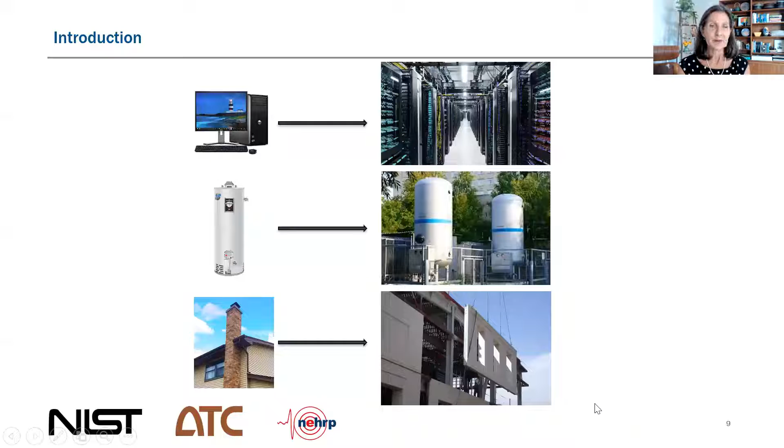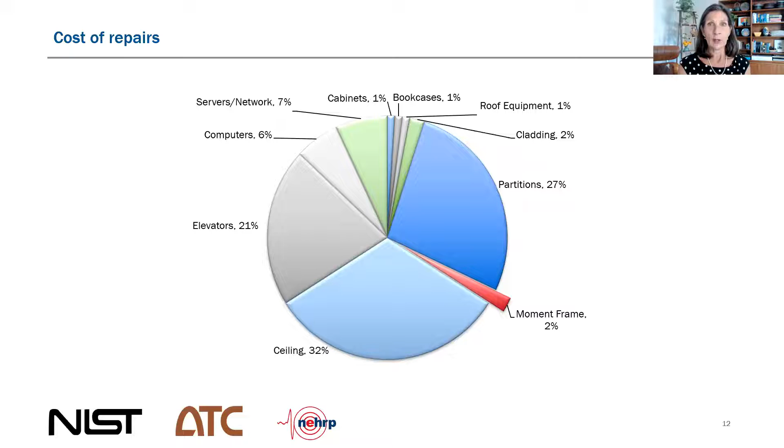Not surprisingly, because of the value they represent in the building, in most earthquakes most damage is going to be non-structural. This pie chart of damage is just one building in one earthquake scenario, but the reality is that in most earthquakes, for most engineered buildings, most of the damage is going to be non-structural.

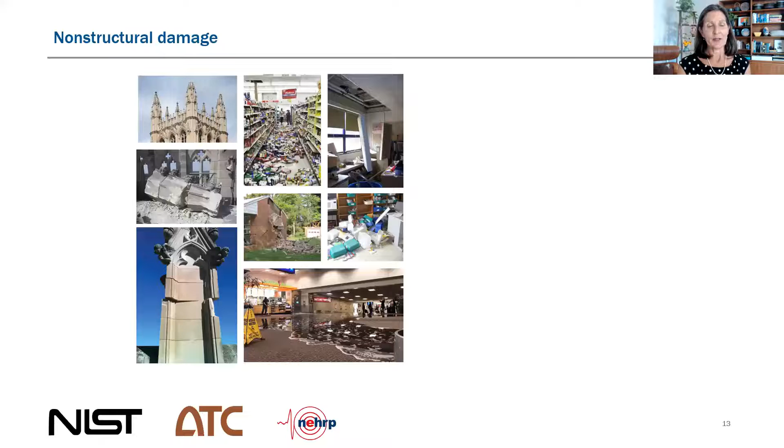And past earthquakes have certainly borne that out. Not only is it mostly going to be non-structural, even in small earthquakes non-structural components can be damaged. All of these images are from really small and short earthquakes. So hopefully that grabs your attention, and hopefully everybody recognizes that non-structural damage in earthquakes is going to affect all of us - where we live, where we work, where we shop, where our kids go to school, and our national treasures.

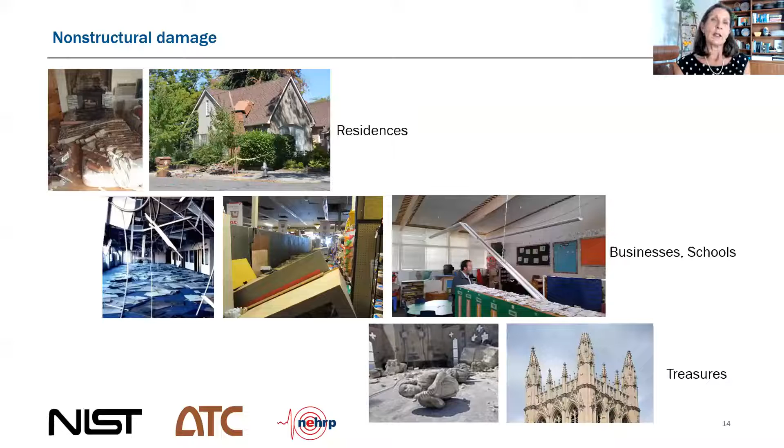It's a big deal. So now let's shift and look at the consequences of non-structural damage. We usually divide it into three categories: risk to life safety, property loss, and business interruption. So let's look at each of those.

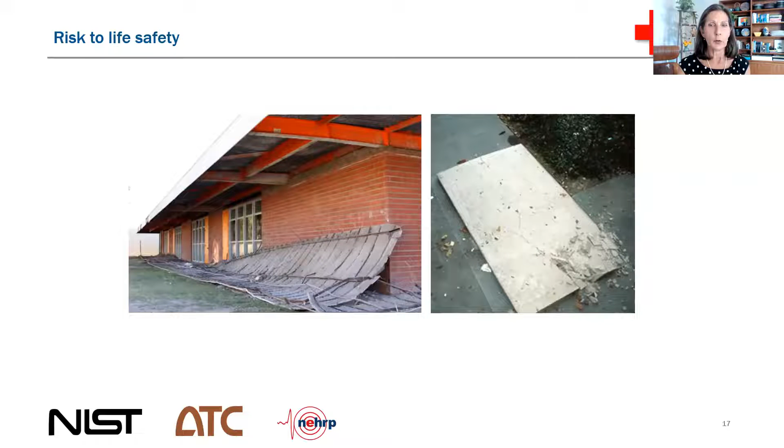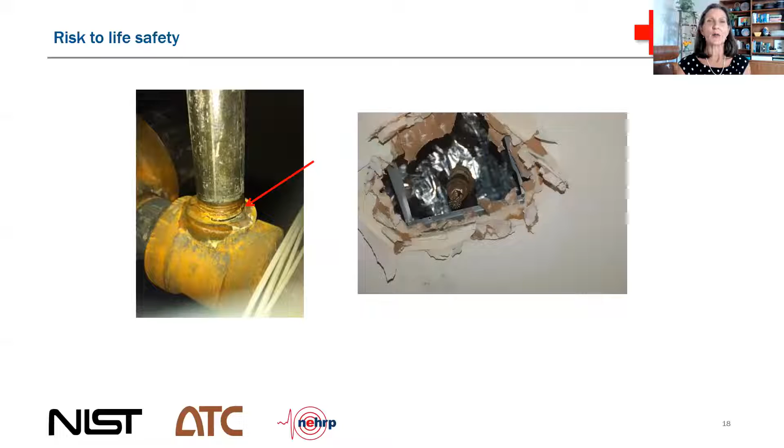The other way that non-structural components pose a risk to life safety is if our life safety systems can't function. So here's some sprinkler damage - if the sprinkler system isn't available to fight fires after an earthquake, that can pose a life safety risk. Similarly, if you can't get out of the building, if egress is blocked, that poses a risk to life safety.

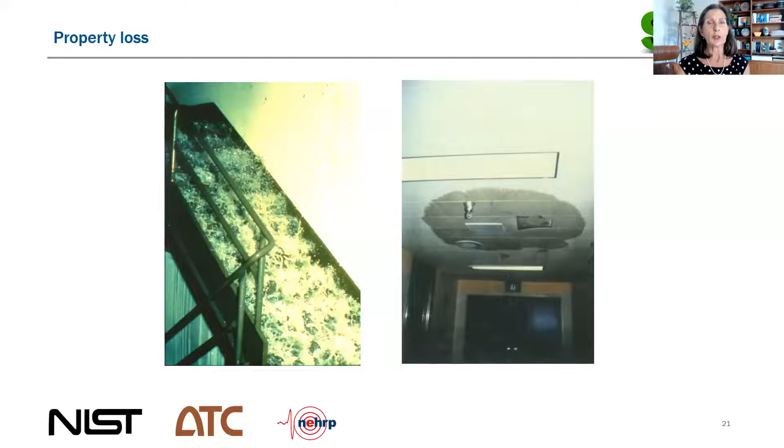So let's talk next about property loss. If it costs money to fix it, that represents property loss - it's a pretty easy concept to understand. What's equally important, and maybe even more important, is recognizing the consequential damage that can impact the losses. For example, when a water pipe breaks, the cost of repairing the pipe could be almost nothing compared to the cost of repairing all the damage from the water. And it's particularly true for pipes under pressure - if they aren't turned off quickly, the cost and losses can escalate very, very quickly.

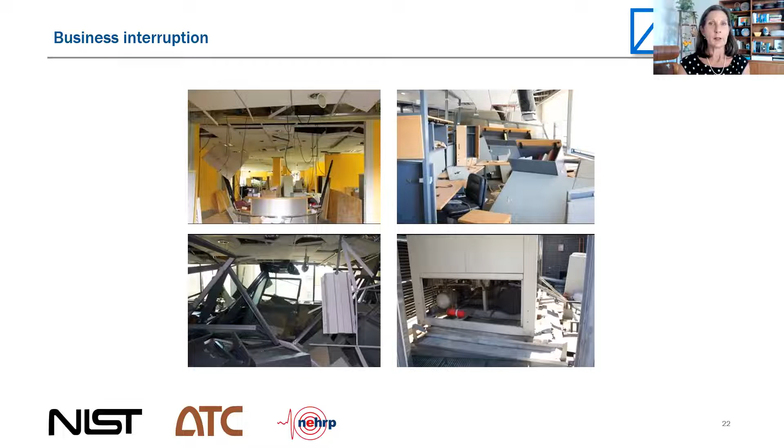And then business interruption. Many businesses will lose money if they can't get back into their buildings. And if you're a manufacturing facility, oftentimes those costs are measured in millions of dollars an hour. So business interruption can be a costly consequence of non-structural damage.

So I want to shift gears and give a little bit of context to this field and the design procedures that we're trying to develop. Let's say we are interested in designing the supports and bracing for a suspended operating room light in a hospital. What I want everyone to recognize is that the design of the non-structural component is at the end of a very long chain of events that starts with the earthquake.

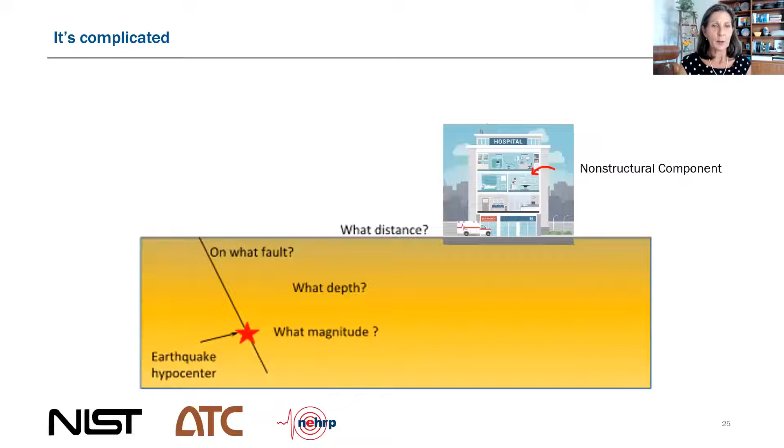For example, we have an earthquake. We don't know exactly how far it is from our building. We don't know how deep the earthquake is going to be. We don't know what the fault characteristics are necessarily. And then we have these waves traveling through the ground - we don't really know what the ground is, we don't know how the attenuation relationship is really going to go.

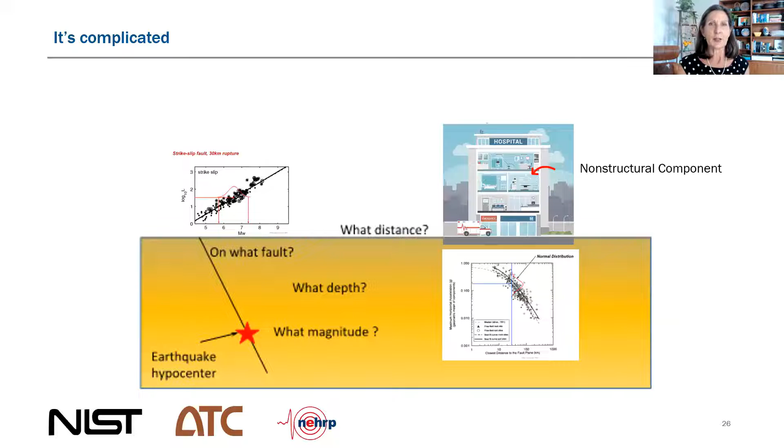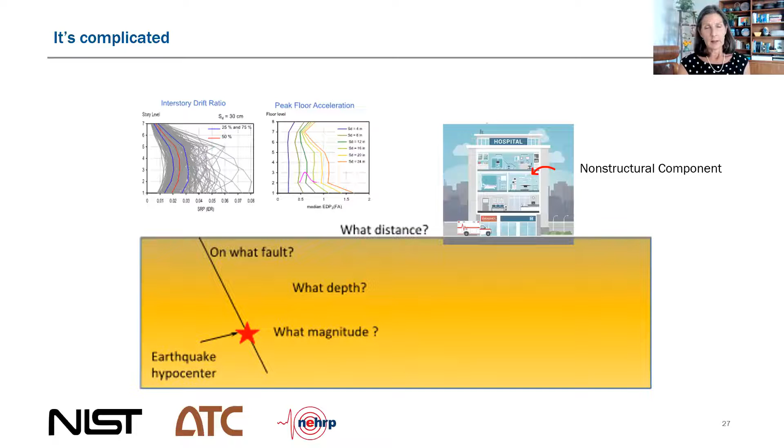And then we get to the building. So now the building is being shaken by this earthquake, and it has its own dynamic response based on all its design parameters. And then finally, we get to the floor that is shaking with some deformations and some accelerations, and we get to the non-structural component. That component can be connected to the floor in many different ways, and each of these has its own unique dynamic response to the shaking that it experiences. And then you've got it connected with all kinds of widgets and stuff.

So the point is that there's a lot of uncertainty in that process. And to think that precision is valuable here is kind of a misnomer - don't worry about too many decimal points. I think what's important is to get the science about right, to make sure that we're addressing all the elements that are important to us, and that we don't get too caught up in the precision of the design tools that we develop.

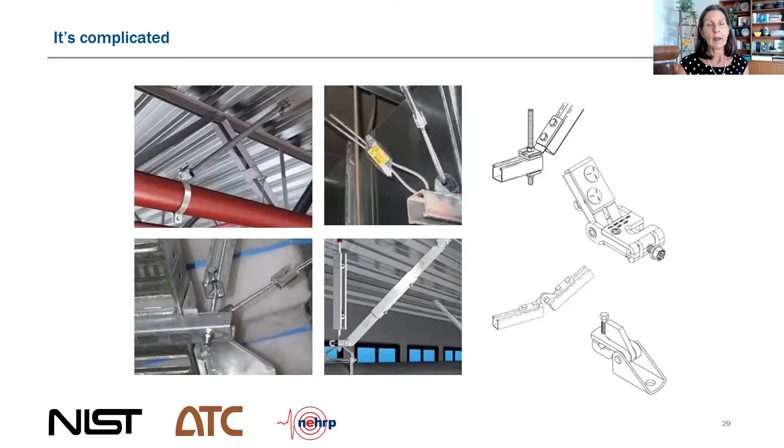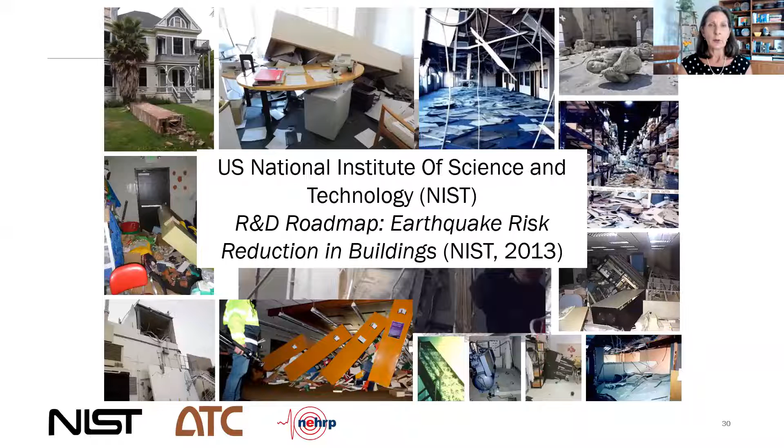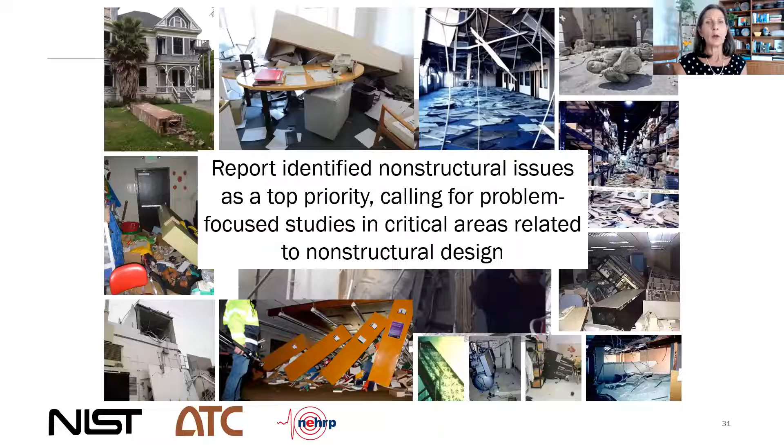About 10 years ago, NIST, the National Institute of Standards and Technology, got together a team of experts to think about what research they should be doing over the following 10 years. That group wrote a report, and in it they identified non-structural issues as a top priority, calling for problem-focused studies in critical areas related to the seismic design of non-structural components. That is how the ATC 120 project was initiated.

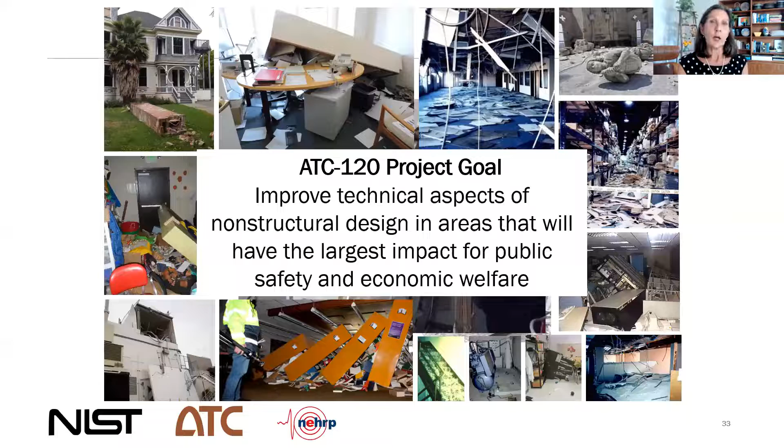NIST went to ATC, which started a project with the goal of improving the technical aspects of non-structural design to get the most bang for the buck, focusing on the things that are most important. This ATC 120 project is really the foundation on which the code changes we're going to talk about are built.

The ATC 120 project ran like all good ATC projects. Many experts were involved from all walks of this field. We got together over a period of many years, and Brett and I were both leaders in this effort. The first thing we did in the first year or so was a knowledge study, bringing together everything that was known so we didn't duplicate it and could build from that. This is a great document that's available for free and provides a nice background for anybody who wants it.

The subsequent years we spent trying to figure out all of the components to the problem—what are all the things we need to study together to come up with how we should be designing non-structural components. You can't just look at one thread; we had to weave them all together.

We wanted to look at and evaluate the existing code requirements, study parameters that affect non-structural component response, and use available strong motion records to get quantitative information, supplemented with analytical models of buildings. We needed to investigate anchors to concrete, since most non-structural components are anchored to concrete. We wanted to see if we could develop a design philosophy for non-structural components, and look at the performance objectives we should be using. These are the kinds of things we did as part of the ATC 120 project.

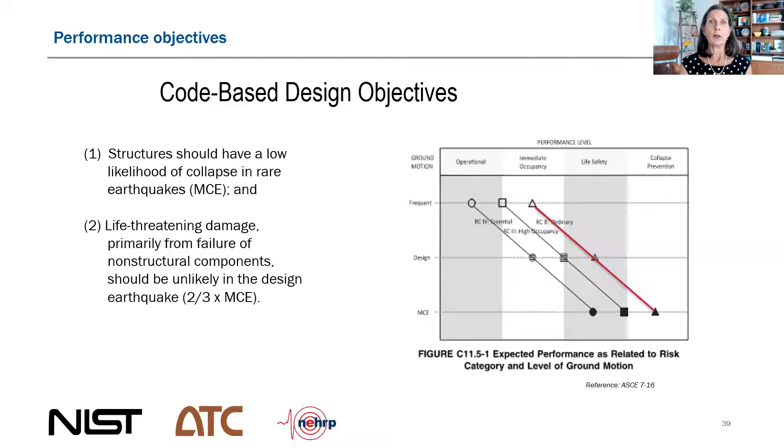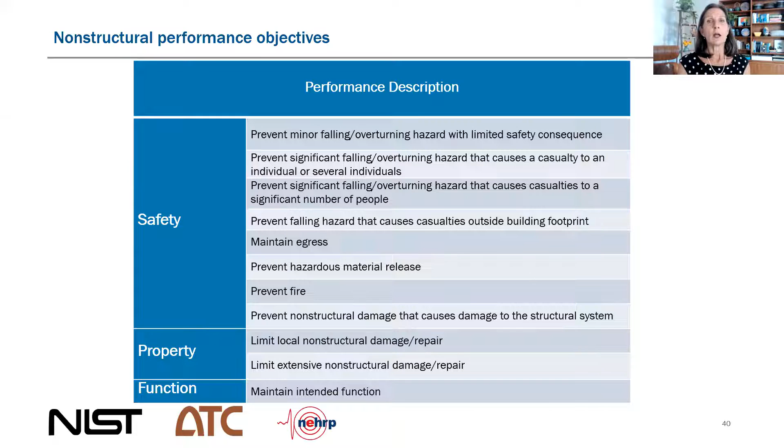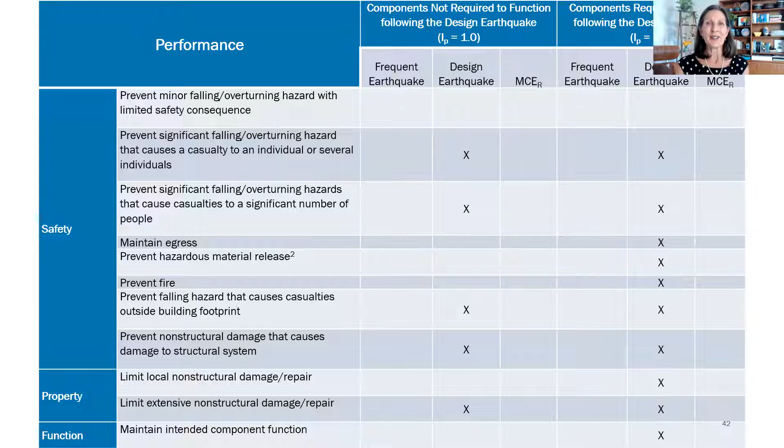We have a matrix showing non-structural components divided into 2 categories: those that don't need to be functional after an earthquake—importance factor of 1 components—and those that need to be functioning after an earthquake, importance factor of 1.5. We filled in the blanks to see what we're trying to do and what we need to pay attention to in order to get the code provisions right. Mostly I want to point out not just what's in the code and what it's based on, but what it is not.

And the code, again, for most components, is not worrying about function or property loss. Those are things that if you really want to worry about them—and being up and operational after an earthquake is critical—you need to do something more.

So anyway, there's a whole chapter on performance objectives. Then we looked at the current code and studied how it was doing, and whether or not there needed to be any improvements to it.

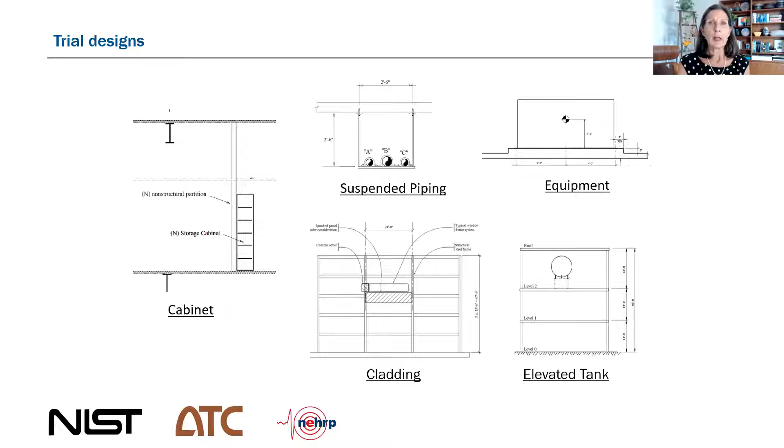The way we did that is we identified sample problems, these design examples, and had five different firms work through design problems to see if they could come up with comparable answers, and to see where the glitches were using the code, implementing it, and understanding it. From that we got their comments, and then we went section by section in the code to create a roadmap for improvements we wanted to see in the future code edition.

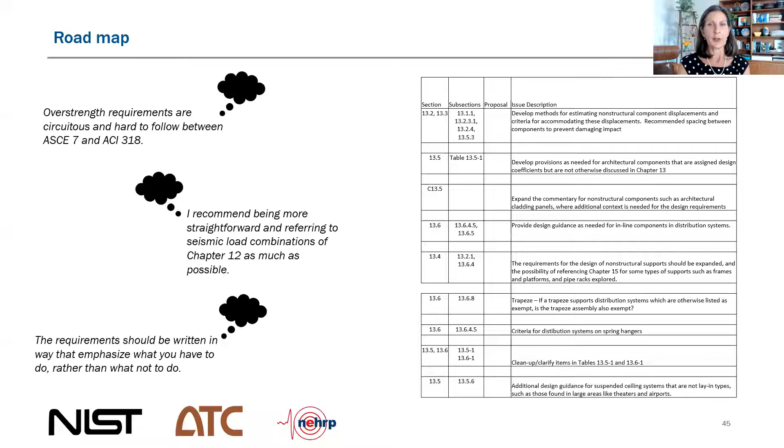The next chapter, understanding the response of non-structural components to earthquakes, is really the biggest chapter. It's the meat of it all. It's what Brett's going to be talking about, because what we were trying to do is understand the science behind the response of non-structural components. I'll defer to him on that subject.

Next, as I mentioned before, we wanted to see if we could develop a design philosophy for non-structural components. We looked at whether we could design them like we do structures, with a ductile fuse in them. And what we found is that while that is possible, it's not that easy.

For example, here there's a component anchored with angles. You can imagine that the weak-axis bending in the angle would be the fuse protecting the anchors. Totally makes sense. But when you go in the opposite direction, ninety degrees shaking, it's just not so easy because the response changes.

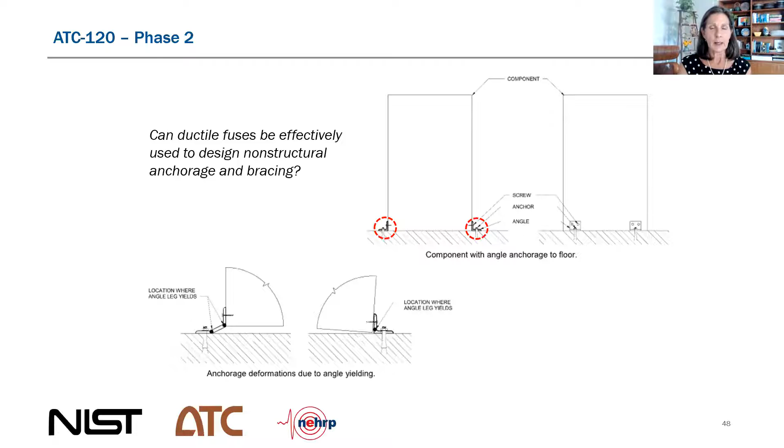So there's language, there's a whole chapter about this—I'd say it's of interest but not practical implementation yet. Then we have a chapter on the holistic approach to protecting non-structural components. I want to underscore the importance of this, because we spend a lot of time worrying about forces and deformations, but it is way more than the F sub P equation. If we really want to protect non-structural components, we have to think about a whole lot of other things.

For example, we need to make sure that every component that goes into the building that we care about, somebody is assigned the responsibility of designing the protection for that thing. We have to make sure on the other end that there's somebody there to inspect it and ensure that it was actually put in properly.

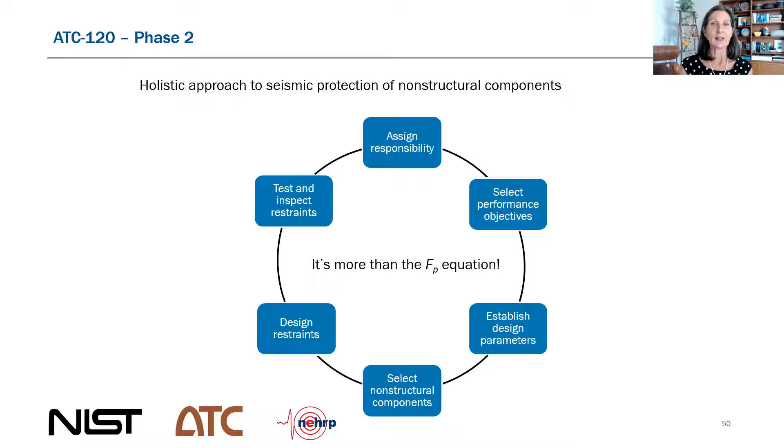And if we go beyond the engineering, we can think even more holistically, a little more outside the box. What does it take to keep a building reliably operational after an earthquake? Well, maybe if there's something you really need to be functioning, maybe you need to have another one for the just-in-case situation.

Or maybe you need more shutoff valves so you can turn off the water if the pipe breaks. Maybe you have a contractor on board who's immediately available to repair things after an earthquake, or you do things off-site in a location that won't be affected, or you make sure staff is available to help right after an earthquake and knows what they're doing.

So the idea here is to recognize that the field of protecting non-structural components from earthquakes has a very important engineering component. It also has other considerations that are equally important.

There's also a chapter on recommendations that I'm not going to go into right now, but there's much more that can be done to really support the continued development and enhancement of this field.

So in closing, I just want to say I hope you get how vast the universe of non-structural components is, the consequences of non-structural damage, how important they can be, and the losses that can accrue as a result—and that there are tools we've developed based on the ATC 120 project that will go a long way to advance this field.

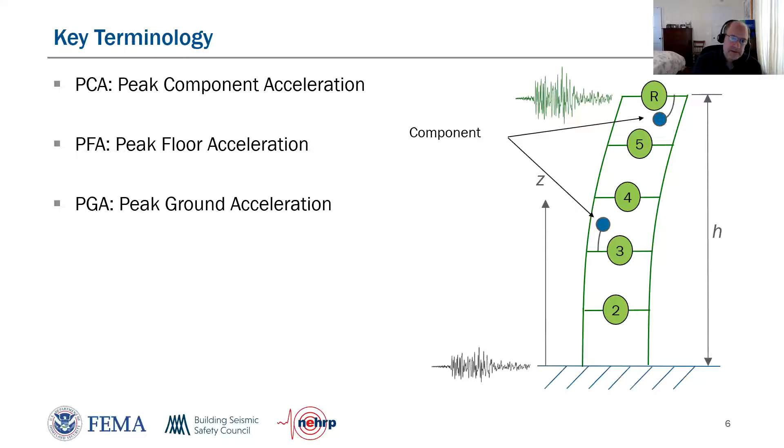So we said, okay, let's gather the past information, put our heads together, and think about things we want to investigate, to see how much influence they do or don't have on the PCA response of the component.

If you have a component sitting at the outside edge of a building that's twisting more than at the center of rigidity, that matters. And if a component is on a wood big-box roof versus a rigid diaphragm, there's definitely a different response.

We concluded that was too complicated to include in the building code. It's not that it couldn't be done, but we always have to strive to be practical and not excessive, so after a lot of soul searching, we decided to take those out.

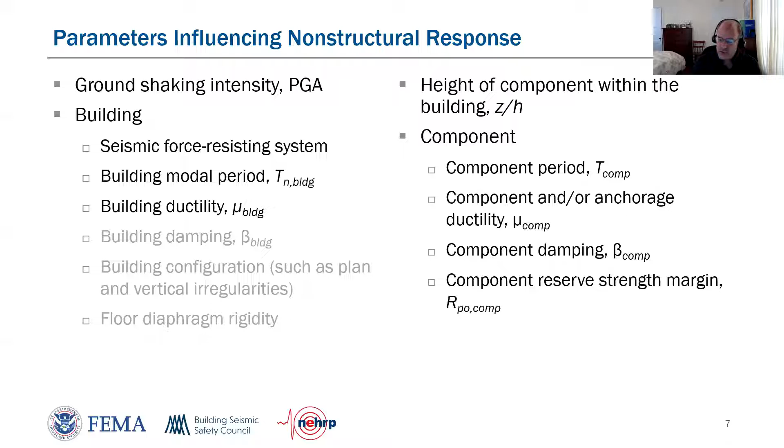I'm going to go through the rest of these things one by one and show you what they mean, and what we found from both recorded efforts and individual project-specific research.

Here's some discussion about whether the seismic force resisting system matters. Currently in ASCE 7-16, this is not part of non-structural design—it doesn't matter if you're in a shear wall building or a steel moment frame building, you get the same design force. Does that make sense?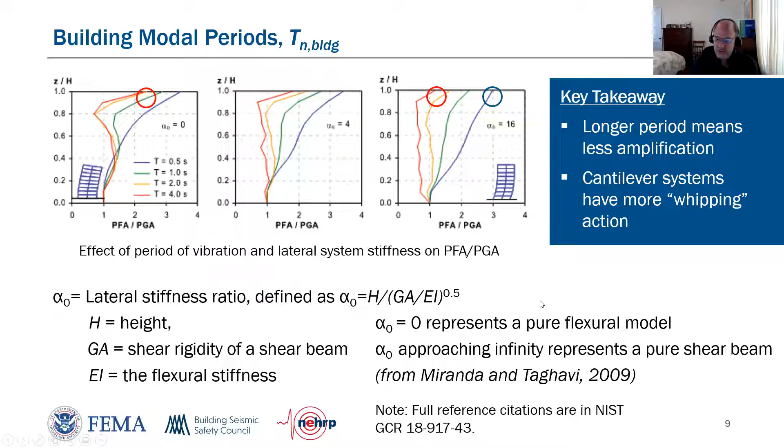One of the things we found that we liked a lot is to capture this idea of resonance. We thought of normalizing the period axis with the component versus the building. So let me talk about what that means.

On the left, this is sort of a classic response spectrum kind of plot, like some of the ones you were seeing previously. So the y-axis is the amplification if you're at a floor, what the component itself feels, and then it shows you that as the period of the component, that thing that's wiggling on that floor, as that changes, the response changes. It's dispersed, but there's clearly an increase in the middle there around 0.5 second to 1 second, but it's more precise and more compelling when you normalize the T component with the T building. So this is a resonance effect.

So when those two things are equal, you can see how there's this nice sharp increase. And then when those two things are not equal, either far to the left or far to the right, there's very little increase. So the dynamics of the component versus the building, particularly on period, are pretty important and dramatic. Capturing that effect properly is important to getting a good understanding of response.

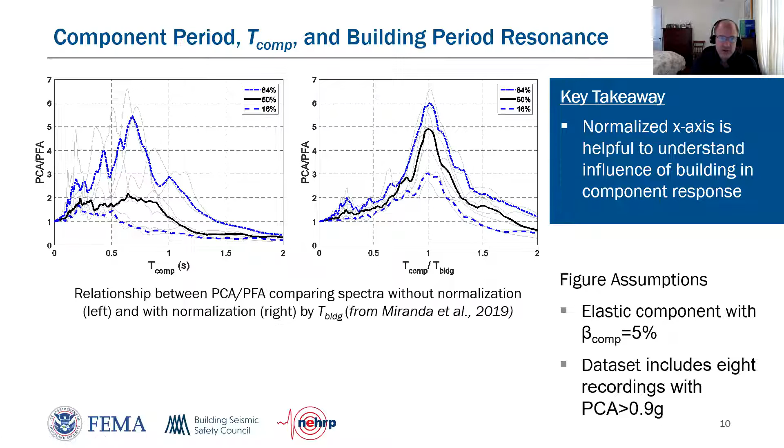There's different places where ductility can come in, and I'll show you in a minute about the importance of ductility. So we take this rocking object, say it's a transformer or a cabinet or something like that, and it's got angles at the bottom. The component itself could yield and absorb energy. The angles at the bottom could be doing something, or the anchorage itself, if it were properly and luckily designed to be ductile. Sometimes that's impossible because of shallow embedments, but all three of these things are potential sources of ductility.

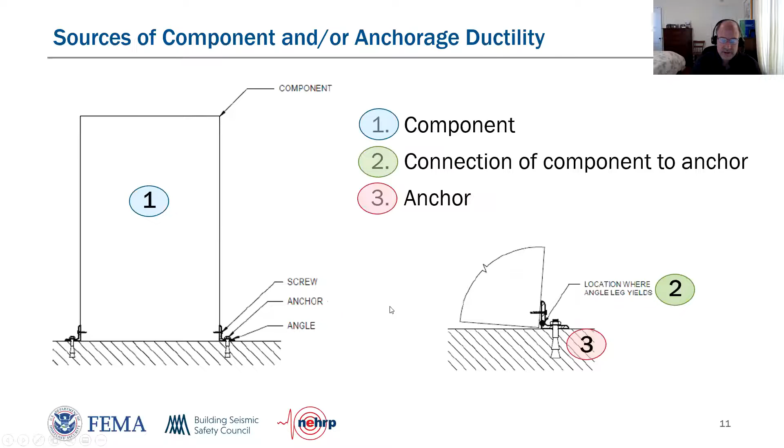Why do we care? We care because of this plot. So this is another one of these normalized x-axes. We're talking about, at resonance, when the component and the building are in sync with one another at 1. The y-axis here is the component versus the floor. So there's a family of curves here, and elastic means no ductility. Nothing has yielded yet, nothing is absorbing any energy. So the elastic component has the biggest response, almost a factor of 5 here. But if we put a little bit of ductility, 1.25, 1.5, 2, you can see that there's this dramatic reduction in the response. So just as some things increase it, resonance, other things decrease it, ductility and the associated energy absorption.

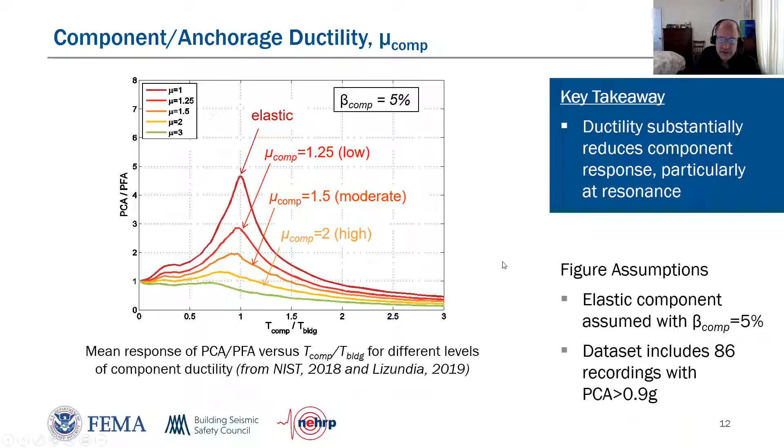So to cut to the chase, here's a key comparison of the equation as it is now and how it changed, together with what I was explaining a minute ago. So ASCE 7-16, let's think of it as having 3 parts. The 0.4 SDS, that's the ground acceleration essentially. If you divide the peak of the short period acceleration by 2.5, that's the same thing as 0.4 SDS, and that is PGA.

Then there's how does it change going up the building? That's the 1 plus 2 times Z over H. So if you're at the roof and Z equals H, that's a factor of 3, 1 plus 2. And then, once you're at that elevation, whether it's the roof or the third floor, there's how does the component change with respect to what the floor is feeling. So that last orange one, that is essentially the peak component acceleration divided by the peak floor acceleration. So we have those 3 parts.

We like those 3 parts. They make good sense technically. So in the ATC 120 effort, we said, okay, we're going to keep the same 3 ideas, just make them a little more refined. So we didn't modify the 0.4 SDS, we just called it PGA.

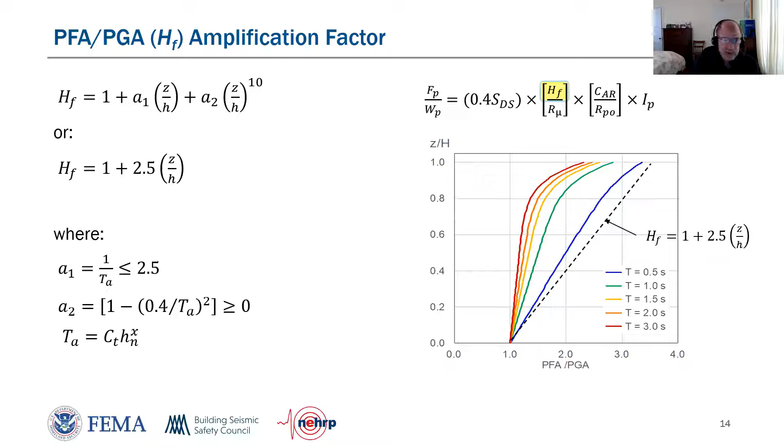So it's a little bit worse, but everything else, if you know your building period, TA, straight out of the building code, the fundamental code equation, we use that for simplicity. So you just need to know what your building system is and what your height is, then you know TA, you can plug it into these equations, and depending on what that is, you'll get this family of red, orange, yellow, green curves. You can see there's potentially, depending on your system and height, a pretty serious reduction in the potential demand from this effect due to this more refined, but not too hard, equation.

Building ductility, which helps, and we wanted to acknowledge it with a simple way to capture it. This came out of the SEAOC Blue Book a little bit, and is basically putting in the R factor, the omega naught factor, and the importance factor, and then there's, for good measure, a square root sign in there. So as long as you know what your building system is, you can get all this and find out what your R mu value is.

We decided everything should get more than 1, so we set the floor at 1.3. You can definitely get more than that depending on how ductile your system is.

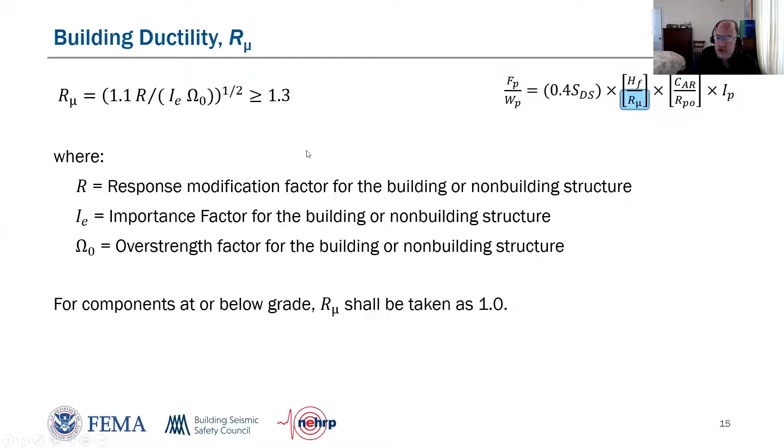Then this effect of PCA over PFA, we captured through what got renamed as CAR. There's a lot going on in this table. One thing we did is to say, well, if the component is sitting on the ground, maybe it's an emergency generator on a pad outside the building in some equipment yard, or maybe it's up on the roof or an elevated floor. So that second category, the building, is going to come into play.

In the first, ground supported, there is no building. That's not currently captured by the building code, but because we're getting a little more precise, we wanted to do that. So what happens is the building can amplify things more than the ground can, and so we wanted to not overly penalize ground features.

I had showed you the importance of component ductility. So we broke things into low, moderate, and high ductilities, which is very similar to how the RP factor has been done by code committees in the past. So that same idea comes into place.

We just, the underpinnings of where we got the numbers, how did we get a CAR value of 1.8? Well, there is a presumption that that is on the ground. It has a component ductility of 1.5, which we're calling moderate, and there's a possibility that it is in resonance. When something is not in resonance, the building period and the component period are apart from one another, then you're not going to get any amplification. And I'll show you that in a little more detail in a minute.

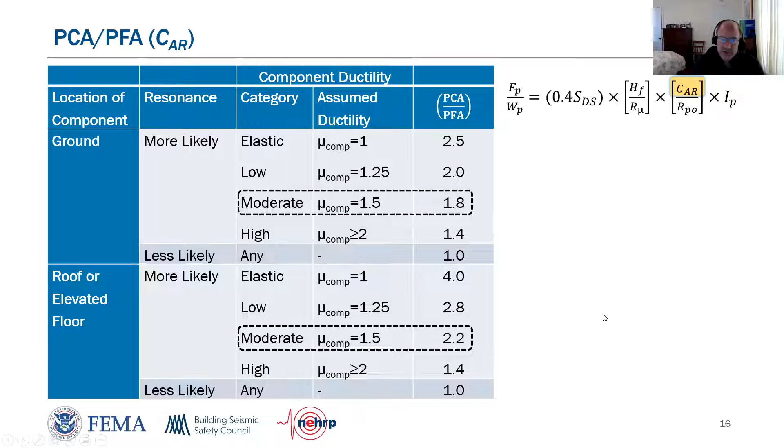So the ones at the roof, you can see those, that final column, the numbers are a little bigger, and that's because the building is wiggling around, helping to amplify what the component feels.

So what is this likely, unlikely to be in resonance? Remember, I showed you those pictures of the normalized response and how when the component and the building periods are in sync with one another, there's higher amplification. And when they're not, what we're calling the green unlikely regions, it's a bit arbitrary where we cut the boundaries off, but this is the idea that we don't want to put a high amplification factor if something is unlikely to be in resonance.

And this is essentially the way it has been done for decades with the RP and AP factors. Okay, so when you've got all those pieces of the puzzle, you will go to the same two tables that you're used to going to. One is for architectural components, one is for mechanical and electrical components. And the categories in those tables are almost all the same. There's been a few changes, and I'm going to highlight one here.

So partitions, we decided that we would have some further refinement of those. You can imagine a taller, if you have an 18-foot tall partition, it's more flexible and it's more likely to resonate than if you have a stiff CMU partition, or a short, sort of more normal 9-foot tall partition. So you plug in, okay, I have a light frame over 9 feet tall partition, and what is my CAR? If I'm on the ground, it's 1.4. It turns out it's 1.4 also in this case.

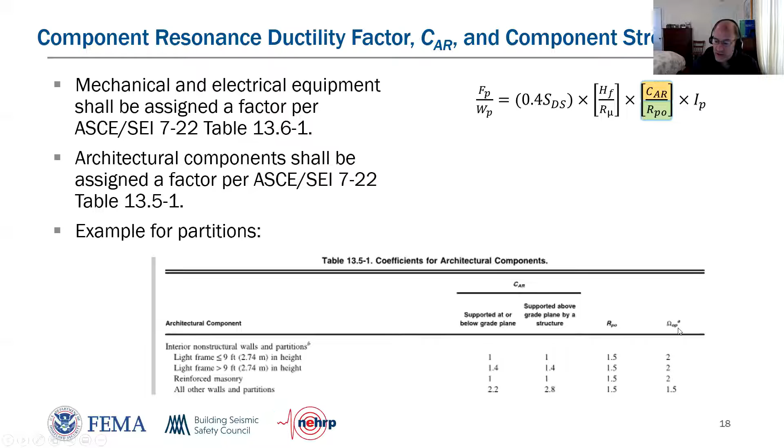If it's above, the ductility that we think is included in partitions from yielding metal and the gyp board absorbing energy gives us a 1.5 factor. And then there is an omega factor associated with that component that now has a subscript P. And we're trying to be careful not to confuse this omega with the omega that we used to design the building structure with. So we deliberately added this P in there because they're definitely not the same thing.

Okay, so that was a whirlwind tour through the design equation. Now I want to kind of talk about a little bit more stuff that has gone on. And so one of the things I was highlighting before is that the way we think of

components that are sitting on platforms or distribution systems will change. So traditionally, the design, say, of the middle element here, some mechanical equipment on a platform, the design of the platform was totally dependent on what the AP and RP values were for the thing on top of it, which doesn't make any sense technically. If you have a moment frame platform or you have a brace frame platform, that's what matters. And the thing on the top is just weight that's adding to it.

So now you're designing the platforms based on the platform characteristics, not based on the thing sitting on top of it. Distribution systems, same idea. If you have, not that you would very often, but if you had a moment frame kind of system, or if you had a tension rod system, or if you had a rigid brace frame system, we have values for that. It doesn't depend on what kind of pipe is going through that, because that's not what matters. What matters is the ductility and the system of the bracing.

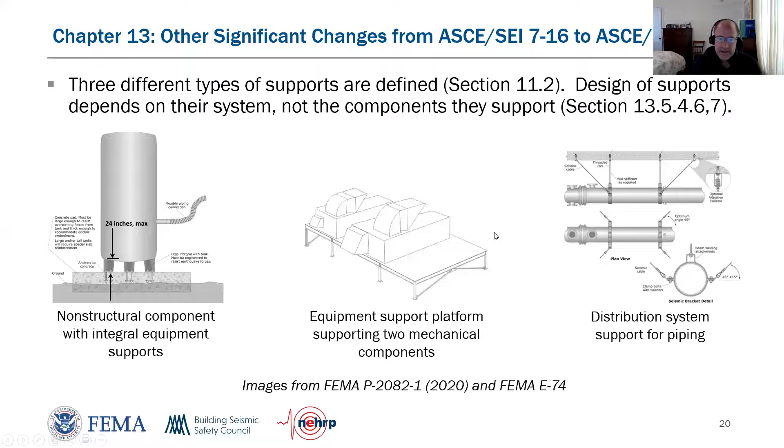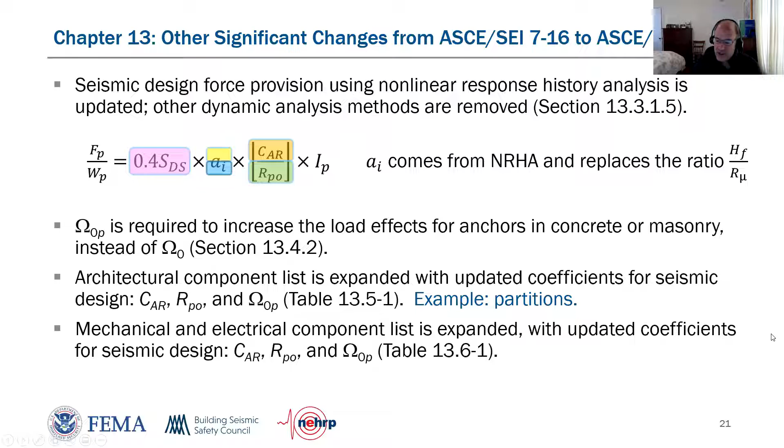We have adapted the omega naught P value, made sure it's distinct and clearly different from omega naught for the building, but we have harmonized it with the values of CAR and RPO. And then we've updated those things. So now the tables, as I showed you, have these in the headings compared to the AP and RP that they used to have. There have been some other adjustments, minor ones, primarily clarifying some things. What's the design criteria? We have explicit load combinations now. Some discussion about how big the weight can be before you have to do certain things.

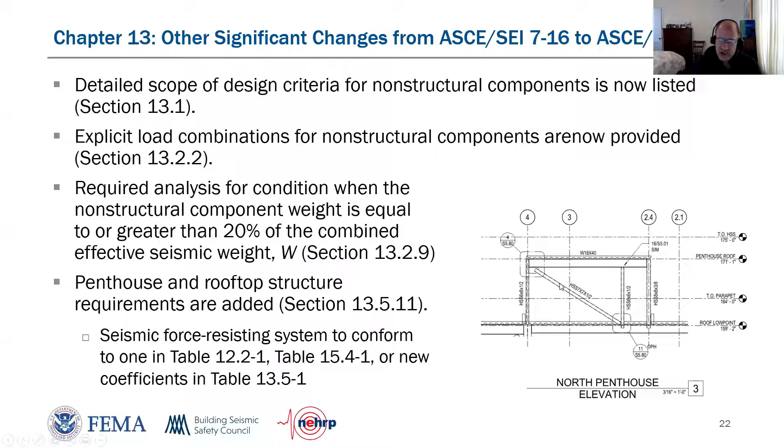Penthouses were a bit of a loophole in previous codes. You could literally, in theory, design an unreinforced masonry penthouse in seismic country, which didn't make any sense. So now it's much more clearly tied to building code requirements, but there's a lot of flexibility. There are multiple ways to do a penthouse, but you've got to follow the associated rules with those.

We did not change the minimum and maximum equations. So even though I've talked a lot about the basic equation 1331, the high bound didn't change and the bottom didn't change. That's based on research. We vetted those and were pleasantly surprised to find that they represented good bounds, so we were going to keep them.

We haven't changed the way displacements are adapted or addressed, or the way component periods are calculated. There were some modest changes to chapter 15, the non-building structures chapter.

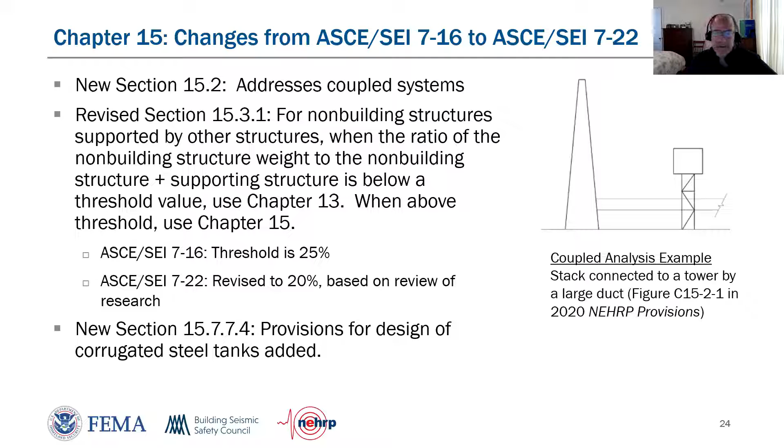There's lots of, when you get in the big time industrial world, big things that go between structures of all kinds of different shapes and sizes and characteristics. So designing elements that couple systems was clarified, and the weights that go into threshold values of when you have to use chapter 15 was revised based on some research, and a whole new section for corrugated steel tanks was added. Otherwise, pretty much similar to what it was before.

Okay, so I'm going to take a breath and we're going to move into some design examples now that you're all experts on the component design equation. So we have one that I'm going to focus on, the precast panel, in some detail, and then I'm going to highlight at the end some other systems.

These are drawn from this design example guide. They all have kind of a look to them. So, what is the component? This one we're going to put in a steel moment frame building. It's an office, it's a risk category 2, and thus it has no special component importance factor. It's not part of the life safety system, for example. It's a 5-story building, high seismic country with an SDS value that's pretty big.

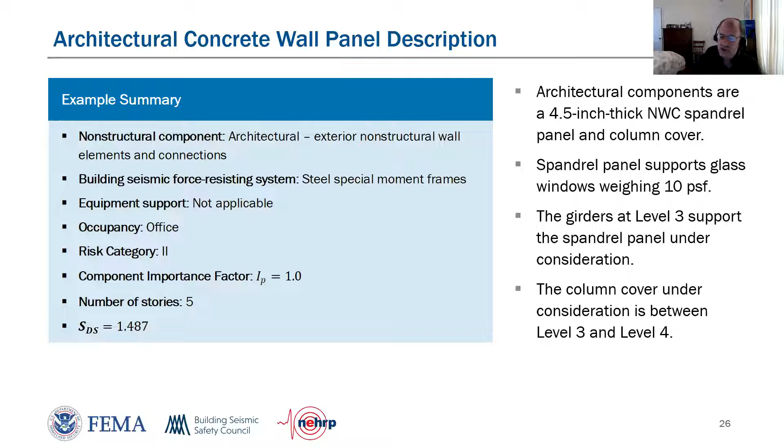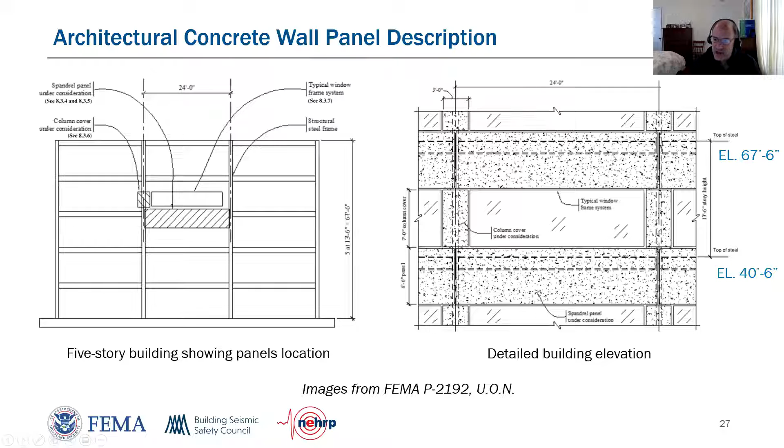One of the things that I think is important and is neglected in the collaboration between architects and engineers until sometimes it's a little too late, is you want to be talking with the architect early on about how we're going to accommodate interstory drift. And why does that matter? Because there's going to be joints somewhere and they're going to be tough to deal with, particularly when different systems meet one another around corners.

So let's look at that in a little more detail, and you can see how tricky this gets. We've got those deep, long spandrels above and below, and these narrow, short covers on the columns. And then we've got 6 pieces of windows in the middle. We're not showing in this picture the window heads and the mullions yet.

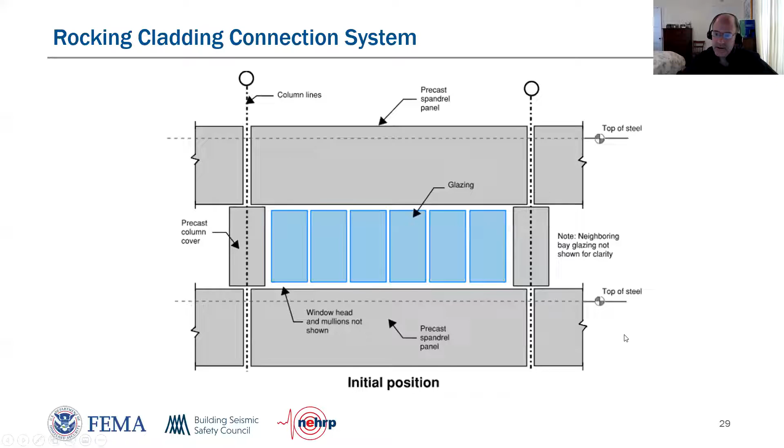Okay, now I'm going to push the building to the upper floor to the left, and the spandrels are anchored to the floor above and the floor below, so they don't move sideways, or rock, or tip, they just get dragged along for the ride, as opposed to the column cover, which tilts, and the glazing, which tilts.

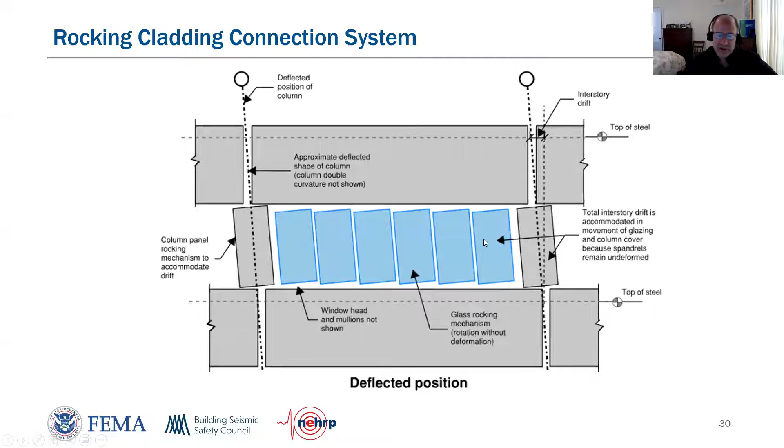One interesting thing about this, not always widely appreciated, is that since the spandrels are staying as rigid objects, the full interstory drift has to be accounted for in the shorter height of the column cover and the glazing. That can make things more challenging if you haven't appreciated that.

Now let's blow this up in more detail and look at a schematic view of how window systems work. On the left, we've got blue panels and purple mullions. If you look down at the bottom middle, where that's a section looking down, you can see the rectangular mullion, which might be a tube, and it has this black thing that sticks out from it that captures the glass inside.

There's similarly a sill, and the head would be similar. The windows are sitting on shims or spacer blocks, usually not right at the corners of the glass, and then they're in this kind of U-shaped channel.

Now on the right, we're going to deflect it, tilt that thing to the left. Well, the glass doesn't change magically from a rectangle to a parallelogram - it can only stay as a rectangle, otherwise it would shatter. So the glass is going to tip up on one of these spacer shim blocks, the one on the left when we push it to the left. That means the upper right corner is going to go up, and if it goes up too high, it hits the top of the head. So you have to have enough vertical space at the top to accommodate that lifting, and enough horizontal room in the vertical pieces of the mullions to allow it to move. This is what window suppliers and designers worry about every day.

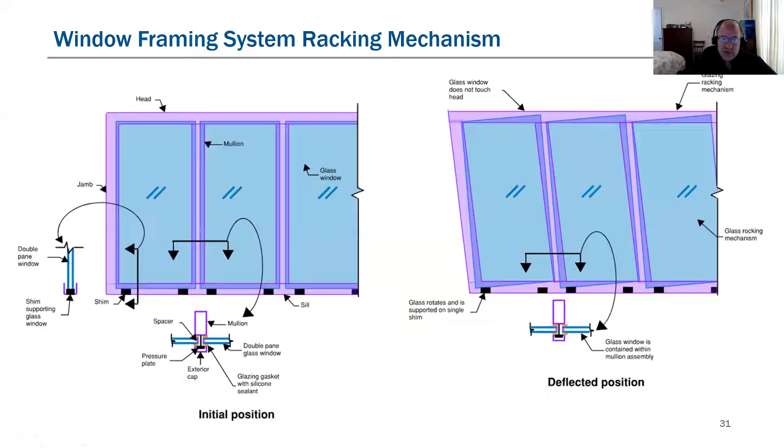Okay, now let's get to some numbers. Remember that table - same table you're used to, the architectural components table. For those who've done this before, there are two categories for cladding: one for the body of the cladding, the wall element itself, which has lower values, and the fasteners have higher values because we don't want them to be the weak link. So we conservatively assign high values to fasteners, and in that case the CAR value is higher.

We decided the component ductility would be similar to those. We would change the CAR value, and then associate the overstrength factor and correlate it with the CAR. It doesn't make sense to design for a high value and then have yet another high value on ductility when you're essentially making it elastic. So those were coordinated with one another better than they have been in the past, I'd say.

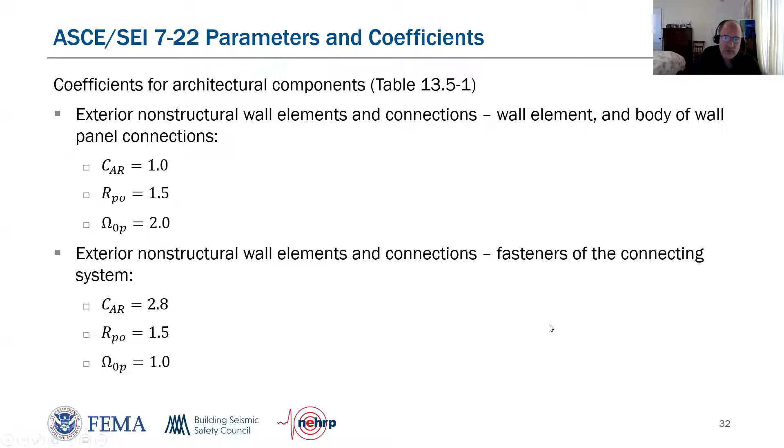So what do you need to know to figure out the design force? Remember, the steel moment frame has an R of 8 and an Omega naught of 3. I gave you the SDS before. We said it was an office building with an IE of 1. We don't have any special life safety issues with the cladding, so redundancy for cladding is 1. We're going to put this at level 3, 40 feet up in a 67-foot tall building.

Here's some numbers about how much panels weigh. Normal weight concrete in this case, and that panel is about 9,000 pounds. The glass above it is 1,500 pounds. The column cover is smaller, so it weighs less.

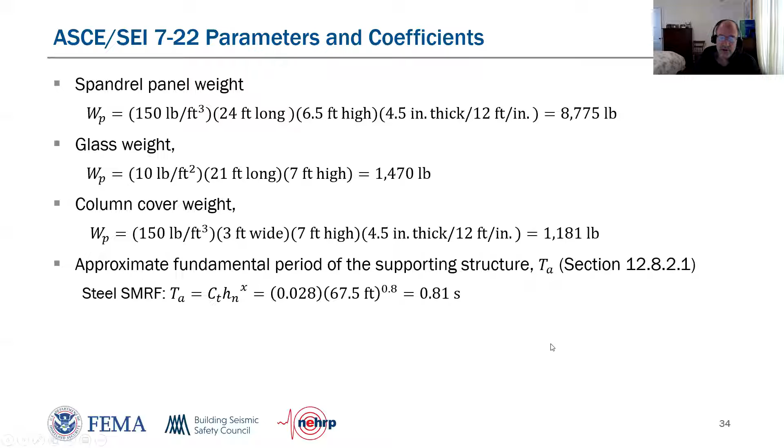The period of this building, the steel moment frame building that's 67 feet tall - we have the CT value, so a 0.8 second period. Okay, so getting up there, kind of at the peak or on the downward side of a typical response spectrum.

So we're going to take that 0.81 factor and put it into the equation for HFs. A1 comes from the first line, A2 comes from the second line. You get those values and plug them into this statistically derived equation, which has a weird exponent of 10 on one of these things. And you end up with 1.74 - that's our amplification factor.

And that is noticeably less than the maximum value you could have had if we didn't account for that.

So the ductility factor for the building is R mu, and we have that 8 value for R and the 3 value for Omega. So for a steel moment frame, which has a decent amount of ductility, 1.7 is our factor there, above the floor of 1.3.

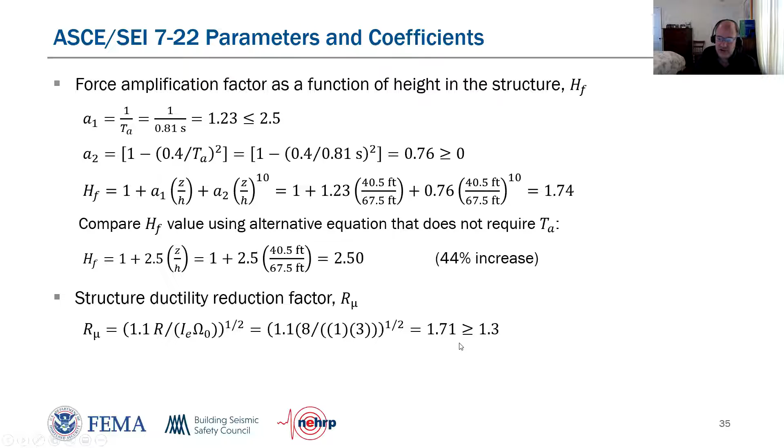There have always been some reminders in the code. We didn't change those. As a reminder, we don't want the component to cause the failure of anything essential. Okay, so that's not much of our problem here.

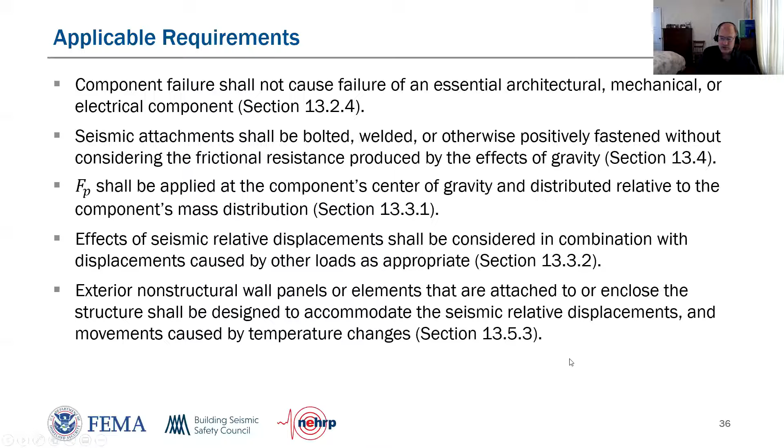You have to be positively attached, right? So friction doesn't work. You've got to be welded, you've got to be bolted, you've got to be something that we call quote unquote positive. We're going to put loads at the center of gravity and distribute them as appropriate depending on how complicated they are. We're going to account for relative displacements, which I'll show you at the end. And we've got to make sure those relative displacements are incorporated, as well as the ability to expand and contract, because this is outside for temperature.

So let's calculate some forces. Remember, I was telling you that the panel and the glass weighs about 8,700, 1,500 - so there's 10,000 pounds of weight that spandrel is supporting. And we're going to plug in the SDS values and all these other variables, and we're going to end up with 0.40 WP.

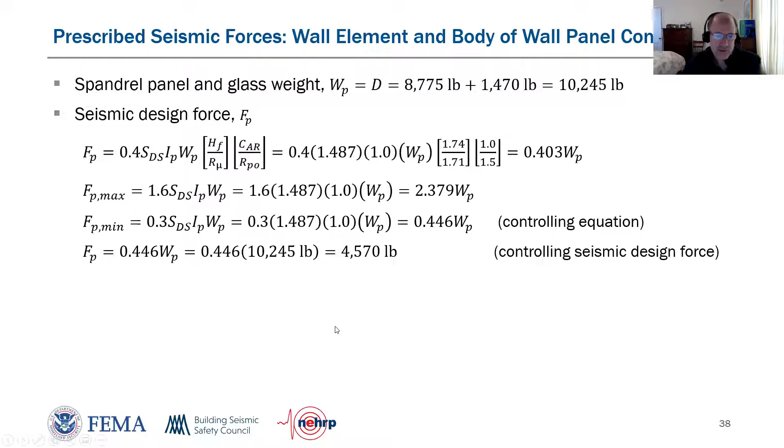Okay, so FP over WP, 0.4G is the new design equation acceleration. The max and min are unchanged, and you can see in this one that the minimum, the 0.3 SDS, governs. This is a common occurrence - it was common before and it'll still be common. So higher up in the building that would have not been true, but it is at this particular level. So you end up with about 4,500 pounds of design force to deal with.

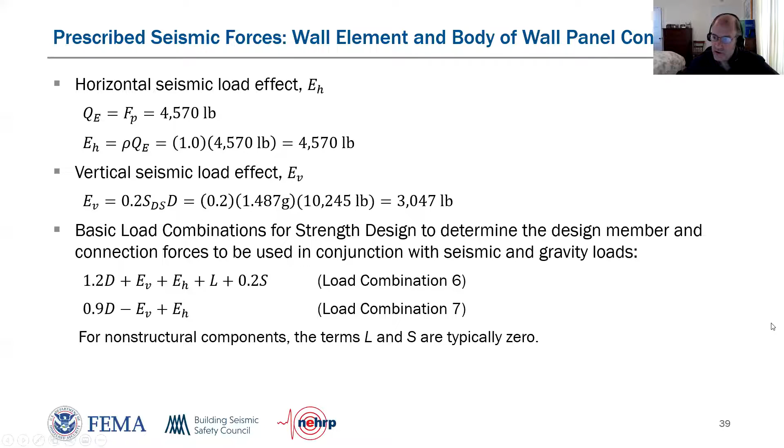So you've got to use those earthquake FP, QE forces. Rho is 1, so EH doesn't change. There's an EV, a vertical component - the 0.2 SDS is unchanged. So it's a decent value, 3,000 pounds going up and down together with your horizontal value of 4,500. And now it explicitly says to use these basic load combinations that you use for everything else, so you plug in the different numbers to those.

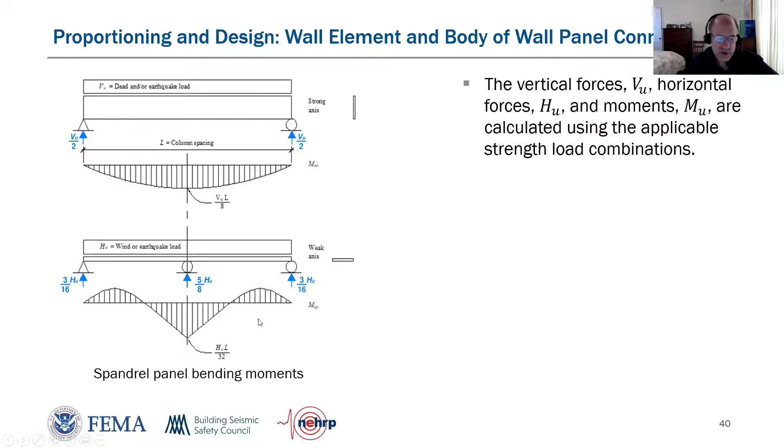So as a designer, if you're looking at this in elevation, it would be spanning as a simply supported beam in its strong direction, WL squared over 8 kind of thing. In its weak direction, it's 3 supports, so you get moments that look like that, and you can calculate those values.

We go through the 1.4D and then the earthquake one, and earthquake, not surprisingly, governs in this case. There's a vertical moment in the strong direction and an into-the-page moment in the weak direction. There's also the 0.9, there's the 1.2D and there's the 0.9 where you're subtracting things, and that is not going to govern in this case because all those values were additive before.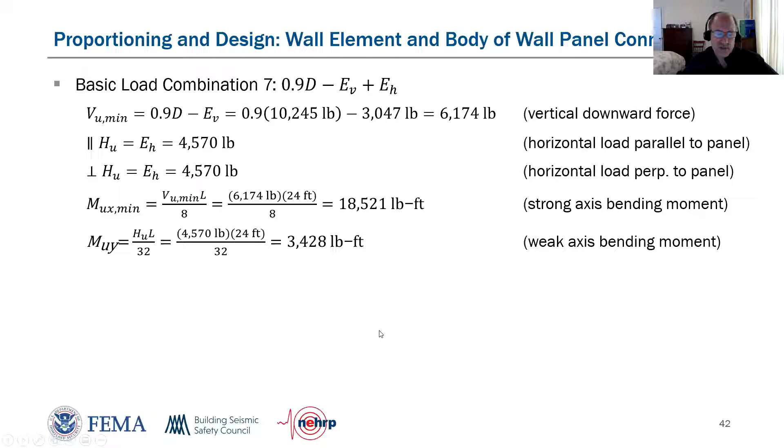All right, so that's the panel itself. So that uses the kind of lower category with the lower CAR, or similar to what used to be the AP values.

Let's say we were designing individual connections in there, like the panel to the building, or if there were screws in this - so there aren't, but in cladding that had that. Then many of the things are the same - HF, RMU, SDS, IP are all the same, but the CAR value is different. It has that higher one because we're trying to be more conservative. So now instead of 0.4, we're up to 1.1.

That means that becomes the governing one in this case, so it isn't that the minimum governed like it did before. And you can see this is a big effect—this is basically tripling the design value when you're looking at the thing that we want to worry about and not have be the weak link.

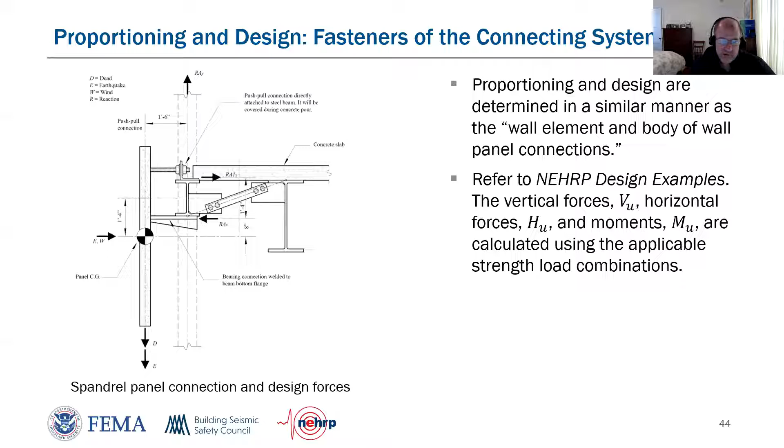Knowing where this is a bit of an art, so this push-pull connection would typically be an example of that. The design example goes into a lot more detail about how you resolve all those things and what the numbers are. But free body diagrams are important, and resolving the forces just like you're used to doing with statics is still part of the deal.

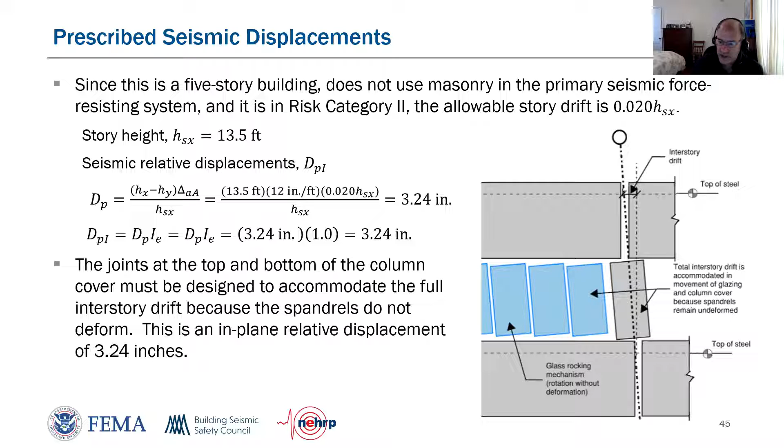Okay, so let's talk about drift for a minute. This is a snip from that picture I showed you at the beginning when we were talking about how things slide or rock—this is a rocking glazing and a rocking column cover system. So if we had a 13.5-foot story height from top of steel to top of steel, and we were trying to make it work for the code allowable limit, in this case 0.020 times the story height, this would transform into a little over 3 inches of movement, which is a pretty big number that has to be accounted for. And because we don't get any benefit from deformation or rotating with the spandrels, we got to account for all that 3 inches, down in the middle there.

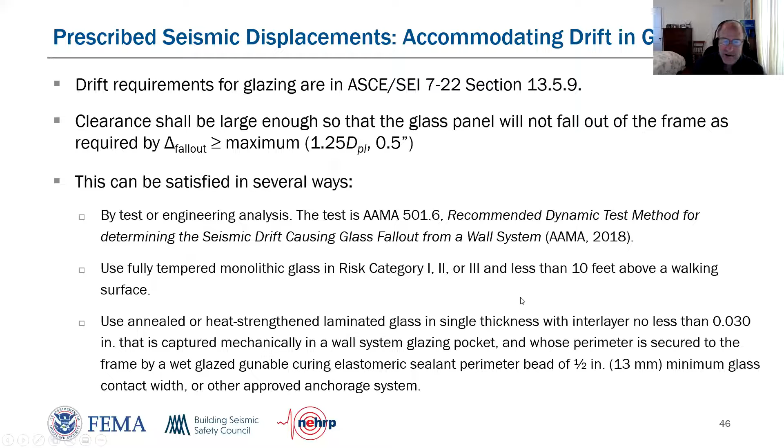Now, the requirements for glazing and accommodating drift, which have been in chapter 13 of the building code for a long time, are unchanged. They come from research and AAMA testing strategies that have been around a long time, so there's a number of them. They can be satisfied in different ways—by testing, by analysis, by using specific things that are considered less worrisome—but you have to meet certain criteria about how tall it is and whether it's fully tempered or in a specific pocket. You can see this last one gets awfully specific, coming from some research long ago.

So let's examine that in a little bit of detail because I thought it was sort of interesting as I was digging into this equation—where does this come from, what does it mean, and why are the numbers that way?

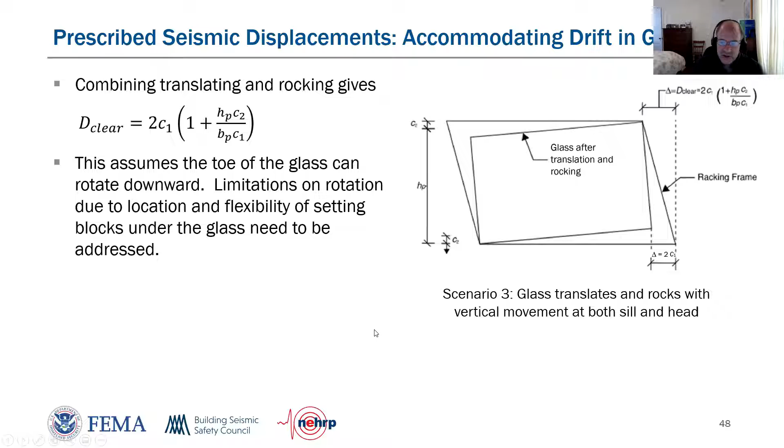Okay, so now I'm going to give you a quickie tour of a few more slides, and then we'll wrap up with the other examples that are in this NEHRP design examples guide.

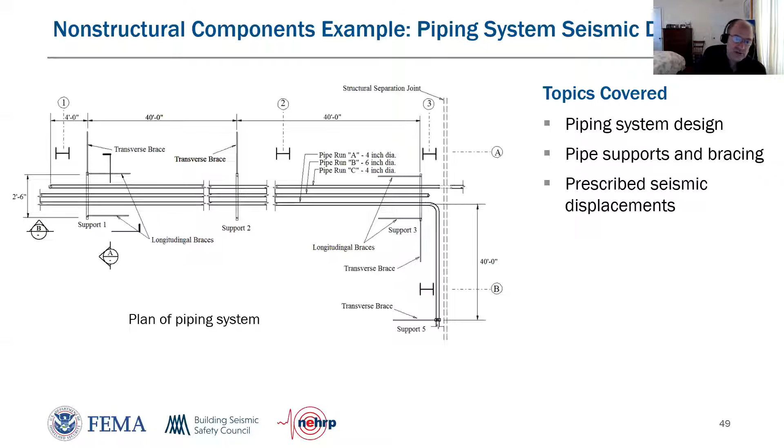So one is about piping. We're looking down in plan here at a piping system which has multiple runs of piping. It's supported by trapezes that have longitudinal and transverse braces. Some of those pipes go up and down, some turn sideways, some have to cross joints. So this example in the design guide talks about all of that stuff.

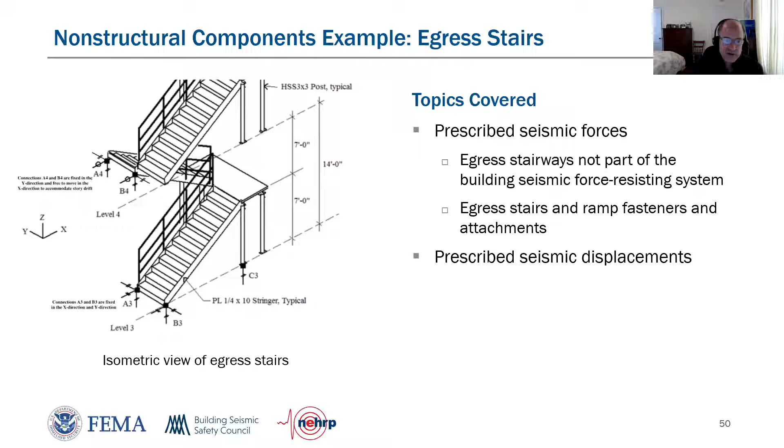There's another example about stairs where we go through how to calculate the forces for stairs, and which parts of the stairs are the fasteners that have higher demands. That came out of the Christchurch earthquake where there were a lot of stair failures, and the code writers decided to be more rigorous about certain elements. We talk about drift in that example and how drift induces forces as you drag the thing sideways, and you have to combine those with the inertial forces, the FP forces.

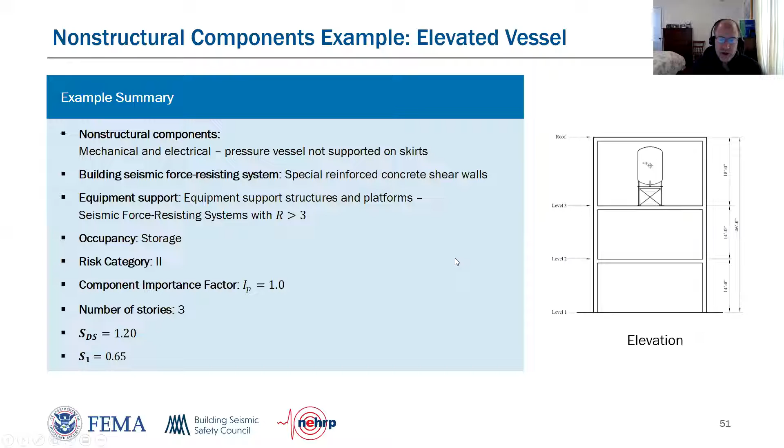And here's how one would derive those. It's that same equation I've been showing you. You plug in, depending on where your height is, depending on what your building system is, the HF and Rmu values, the CAR value and the RPO value, similar to AP and RP. They come from the mechanical chapter. So I was showing you the table for architecture and partitions a few minutes ago.

Now I'm showing you where you get the values for that platform. If it's a decent lateral system, then you have it a little bit better because there's more ductility - in this case, CAR of 1.4 and RPO 1.5. If you were less ductile, you'd have 1.8. If you don't have systems that qualify, and there are descriptions of this, then you have the highest values.

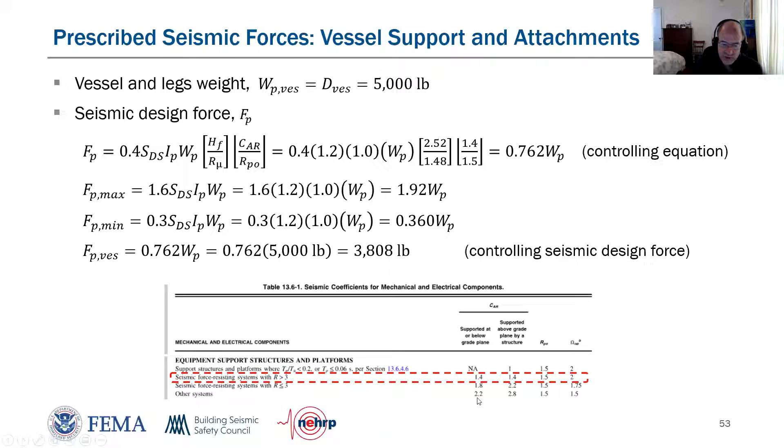And then there's a fan unit design, both if it's on vibration isolators or if they're just cast into the concrete housekeeping pad, because that hasn't really changed. So the idea that vibration springs amplify things, and you better worry about that, is still captured.

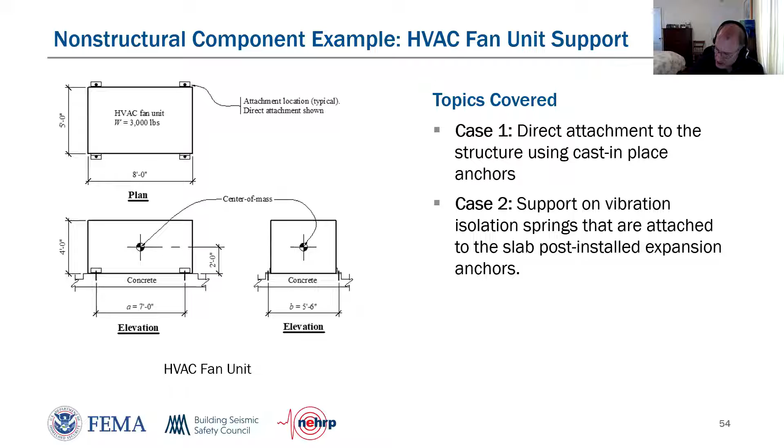So I keep mentioning these NEHRP design examples. Here finally is a picture of volume 1. This is a kind of 3-part series of documents that FEMA funded through the Building Seismic Safety Council to produce, and there were a number of authors. I was the coordinator of this, and volume 1 is a very thick book of design examples and equations and overviews of how things got there, and it talks about new systems that have come into the building code with this latest edition, and talks about diaphragms, talks about non-structural elements in chapter 8.

Volume 2 is a whole slide series for all these different chapters and topics, and then there's a sort of helpful flow chart volume that helps you understand all the things you have to do and in what order to do them. Little known, but valuable, particularly if you're new to the game.

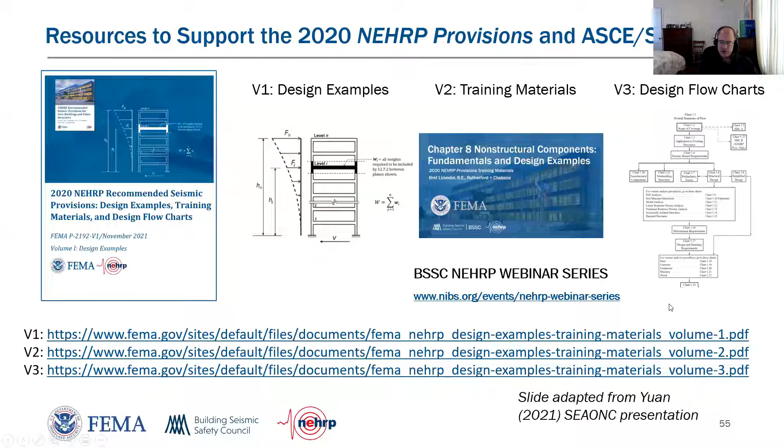And these are the links. These are all free - it's from your friendly federal government, so you can just click onto these things. And I checked it yesterday, it still works. All right, so we are going to turn it over to questions and answers.